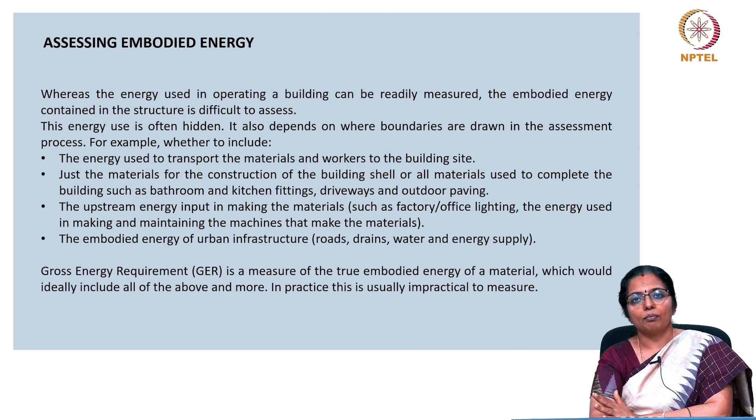Even though the region now includes almost 24% of the global population, not to mention the abysmally low per capita emission of that region. North America and Europe contributed almost 10 times more to global cumulative emissions in this period, though they represent only 13% of the global population.

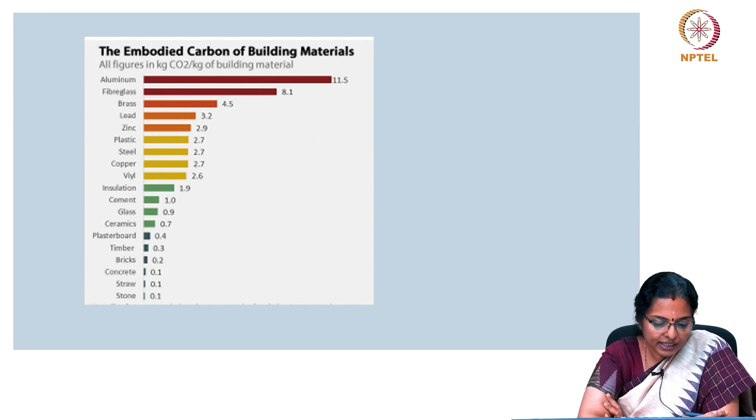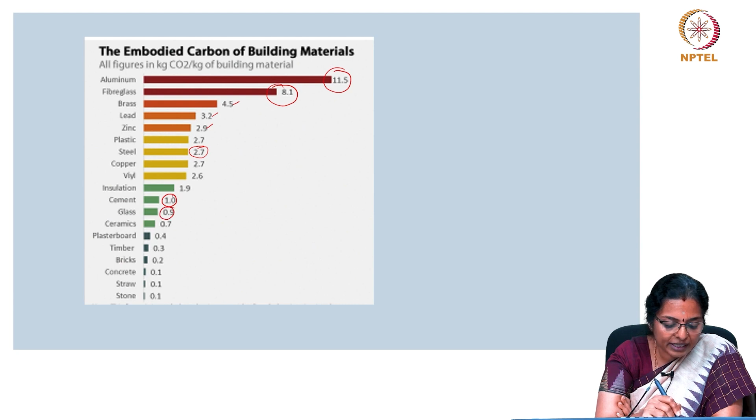Now, if you look at embodied carbon of building materials, you can see that the embodied carbon of aluminum is the highest. Fiberglass comes next. I am not mentioning brass, lead and zinc because of the less volume of material that we use comprising brass, lead and zinc. However, steel is an important material which is used in larger quantities. Cement is one material and glass is another material. The embodied energy of stone, straw, bricks is quite less. Of timber is also quite less.

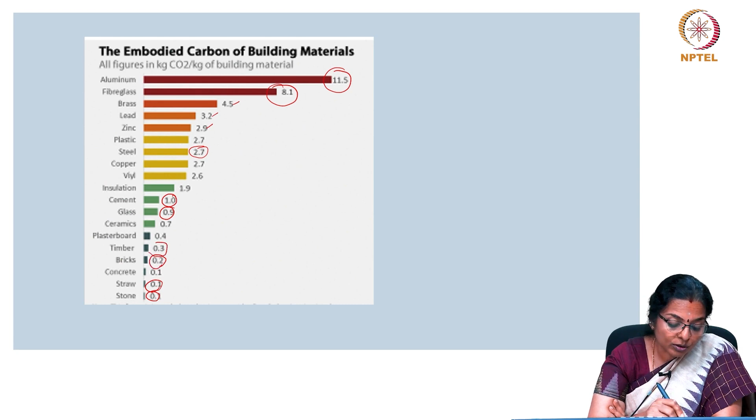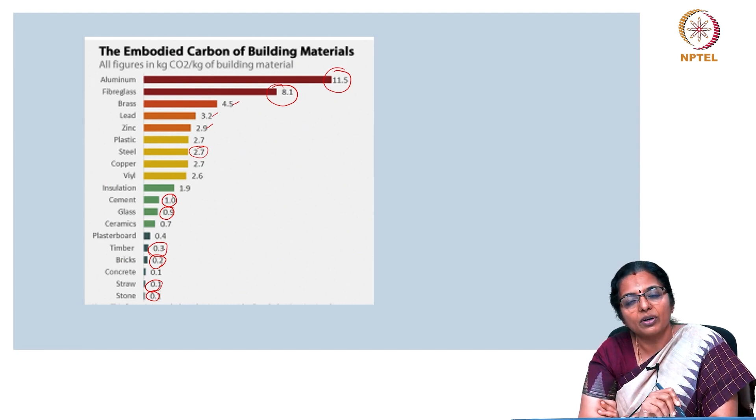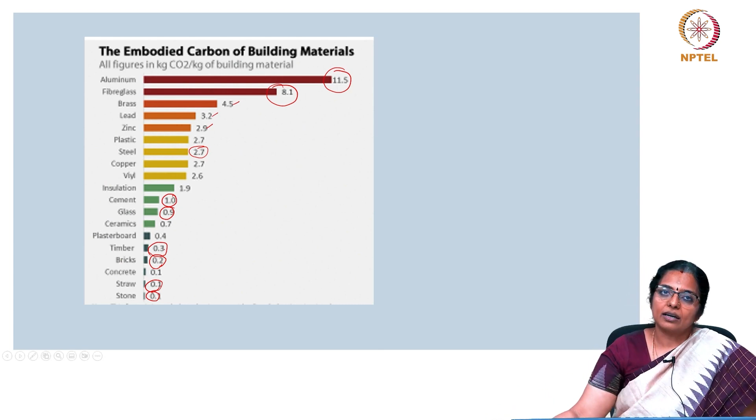But you cannot look at the embodied carbon of building materials only in isolation. You also need to look at the environmental repercussions of using these materials. For example, the embodied energy of sand is very, very less. But if we start using excessive sand just to prove that the building is low embodied carbon, it is going to harm the environment aggressively. So, you need to have a balance and understand energy and environment together.

A thorough examination of data sources ensures the development of models with the best available data. Here we are talking of data of the embodied energy and global warming potential results for Indian construction materials database. Whenever feasible, data on Indian production processes are prioritized for technological and geographical accuracy.

When Indian-specific data is lacking, European production process data is used. This is adjusted for Indian production conditions. Likely technological differences between Indian and European production are assessed and discussed with stakeholders to maintain data representativeness. All key data sources in material model development are referenced with information on input materials or fuels provided.

Data confidentiality constraints, especially from the GaBi database, may restrict licensing unit process data or individual inputs/outputs for some sources. Hence, what you see as data from the Indian industry may not be a result of research exclusively got from Indian industry, but it may be data which is extrapolated based on the data that is available in any other country. The extrapolation aspect can bring in minor errors, but the errors are too minor for us to completely neglect the data.

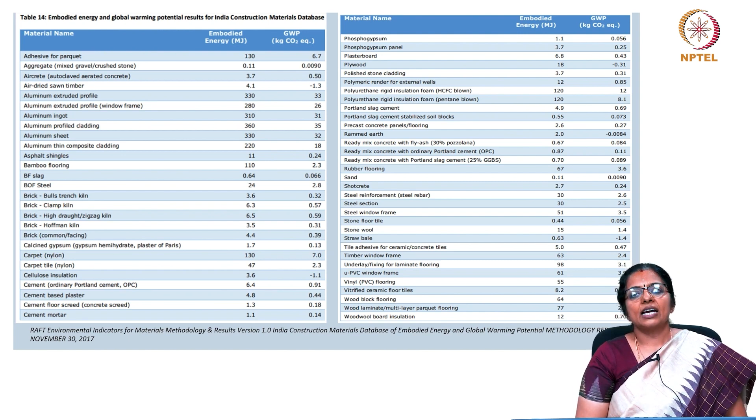Geographical alignment is important. Life cycle inventory models are designed to be reflective of product consumption in India. In cases where the product is typically imported, the production geography in the data set aligns with the country of origin or source mix from which the product is imported. Based on these extrapolations, the embodied energy and global warming potential results for Indian construction materials database is being evolved. If there is a better way of working this out, then this will be replaced with those data.

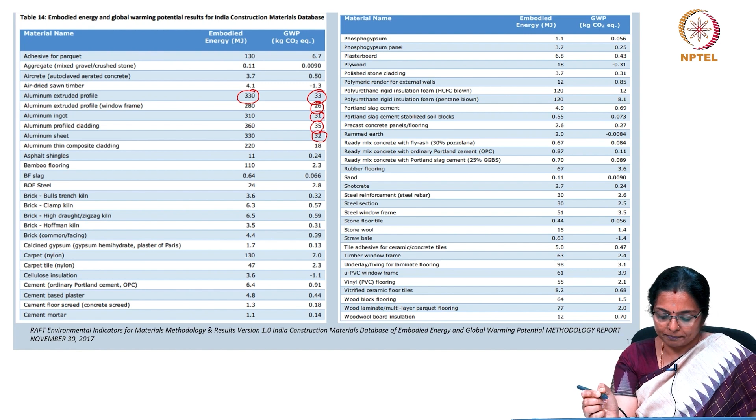As of the data we have, you can see that aluminum extruded profile has a global warming potential of 33 kg carbon dioxide equivalent. All these high numbers of GWP relate to aluminum in some form or the other. No other material comes that close to aluminum, and of the ones which are low on global warming potential, straw bale is minus 1.4 and rammed earth is minus 0.0084.

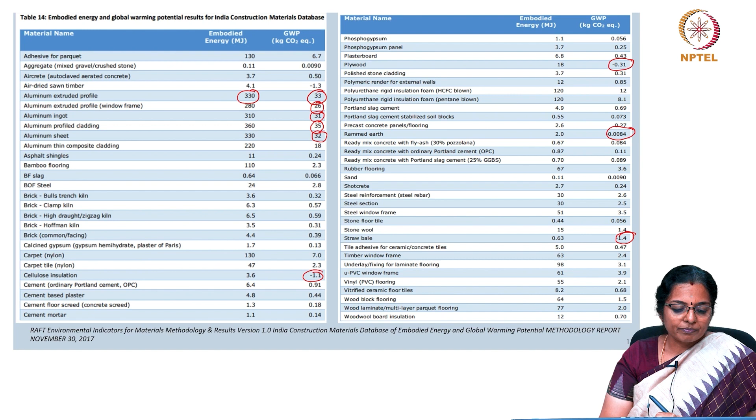Plywood, which is also largely from waste, is minus 0.31. And cellulose insulation is minus 1.1 based on how it is manufactured. Air-dried sawn timber is also minus 1.3. Aggregate and crushed stone is 0.0090, almost close to 0. And you can see that embodied energy and GWP are more or less correlated. More the embodied energy, more is the GWP, and less the embodied energy, less is the global warming potential.

Based on this data and the quantity of building material that is to be used in the building, we can make the right material choices to ensure that our building's embodied energy is moderately low and its global warming potential is also low.

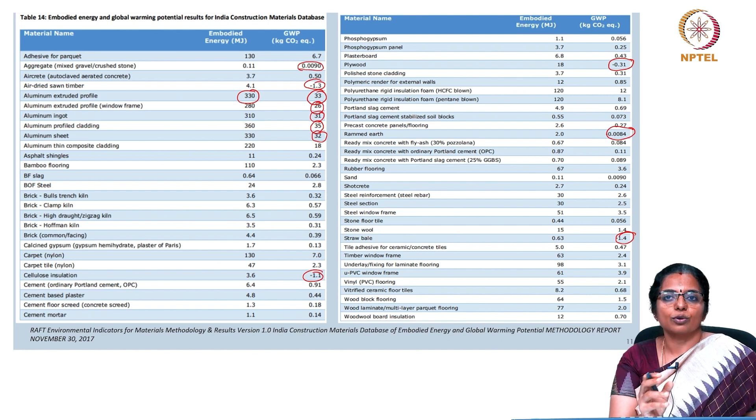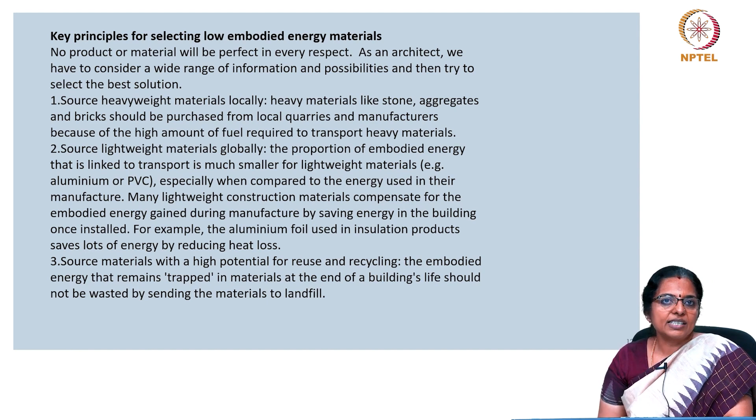Let us now look at the key principles for selecting low embodied energy materials. No product or material will be perfect in every respect. As an architect, we have to consider a wide range of information and possibilities and then try to select the best solutions.

The best solution will be a combination of how much is the global warming potential, how much is the embodied energy, and how much is the quantity of the material used. Source heavyweight materials locally. So, heavy materials like stone or aggregates and bricks should be purchased from local quarries and manufacturers because of the high amount of fuel required to transport heavy materials.

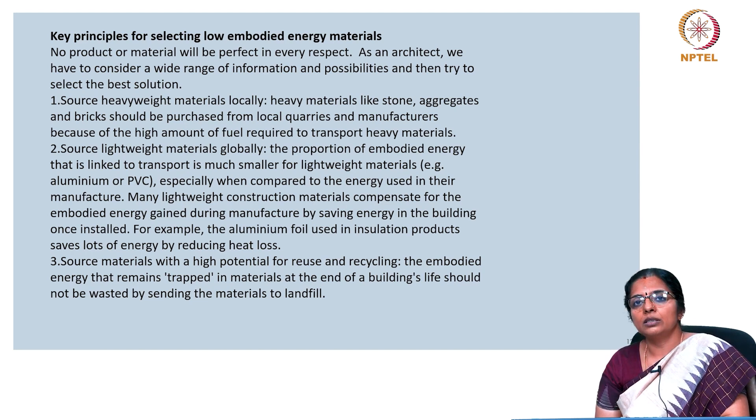Source lightweight materials globally. The proportion of embodied energy that is linked to transport is much smaller for lightweight materials, for example, aluminum or PVC, especially when compared to the energy used in their manufacture. Many lightweight construction materials compensate for the embodied energy gained during manufacture by saving energy in the building once installed. For example, the aluminum foil used in insulation products saves lots of energy by reducing heat loss. So, aluminum is not to be demonized after all, because the amount of heat loss that it saves overpowers the embodied energy it actually consumes.

Source materials with a high potential for reuse and recycling. The number one material that will go into recycling is aluminum. It's a very good material when it comes to recycling. The embodied energy that remains trapped in materials at the end of a building's life should not be wasted by sending the materials to landfill.

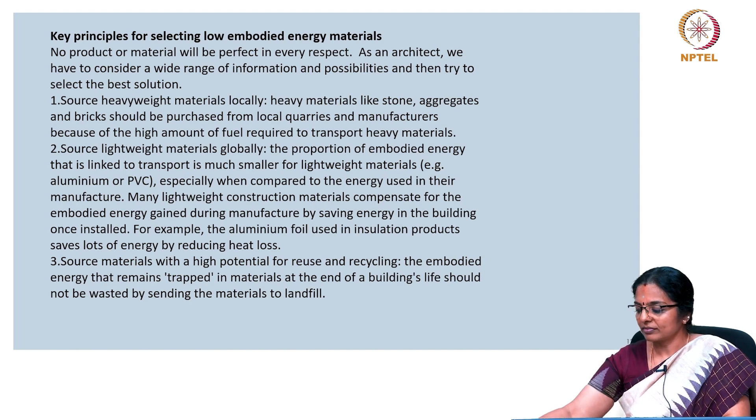Now, let us look at the policy interventions required in India. To enhance emissions reductions throughout the life cycle of building and infrastructure, it is proposed that key actions for central and state governments as well as national bodies must be taken. And certain recommendations have been given. One is operational carbon in building regulations. The national bodies such as Bureau of Indian Standards should enhance existing building codes like the NBC, National Building Code, to address operational carbon from the outset of new building design. It must introduce metrics that measure building performance through carbon emission alongside traditional energy consumption metrics.

State government should develop comprehensive guidelines for retrofitting existing buildings while emphasizing passive measures. The operational carbon management must also be mandated and regulated. Under this, mandate the annual measurement and reporting of energy use and associated emissions for large non-residential buildings at the state level. So, energy intensive buildings must be monitored continuously or periodically. Consider implementing fiscal incentives at the state level for building owners and tenants to encourage efficient management, thereby reducing energy consumption and carbon emissions.